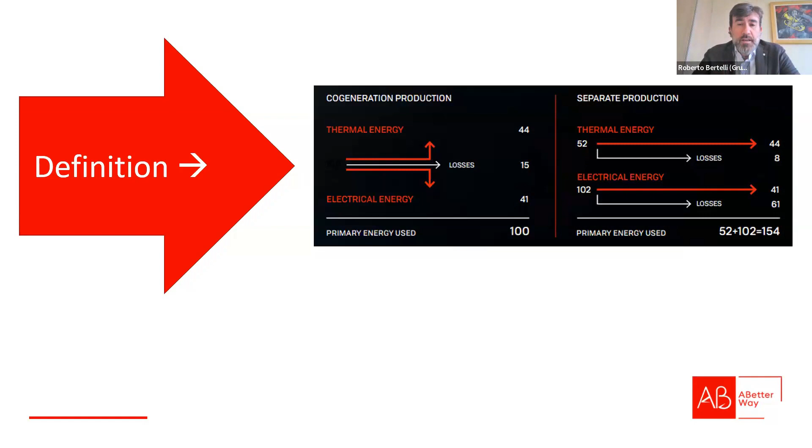Then, as I mentioned, I would like to start from the cogeneration definition. Of course, I don't want to bother anybody because we all know the definition of cogeneration. But every time I analyze a new project, I always ask myself, are we applying this definition in a proper way? Because it seems a simple calculation, but it is very important to recognize that we are saving primary energy, we are saving fuel. So that means that we are reducing emissions. That's why we firmly believe that the cleanest energy is the one that is not burned.

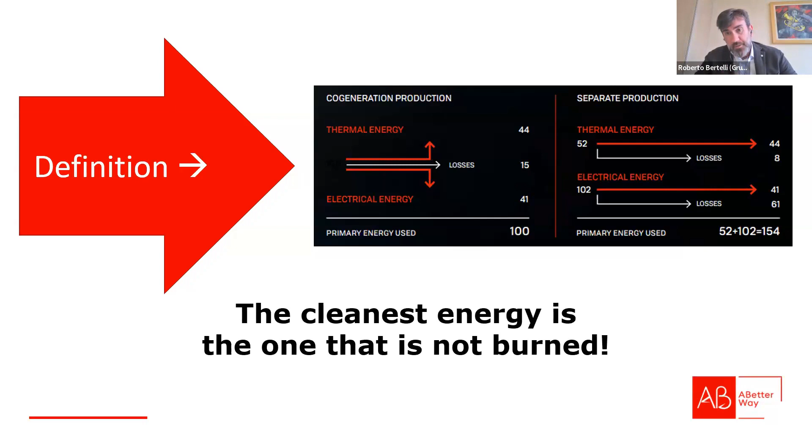So let's keep this definition on top of this page. I would like to share the following thoughts, talking about fuel saving. Have you ever compared the fuel saved from a CHP plant with, for example, the fuel saved from a photovoltaic system? Of course, talking in general, photovoltaic is a pure green energy production. It follows the sun, it doesn't produce thermal energy, so it can work 7 days per week, and it is good for those companies that work 1 or 2 shifts.

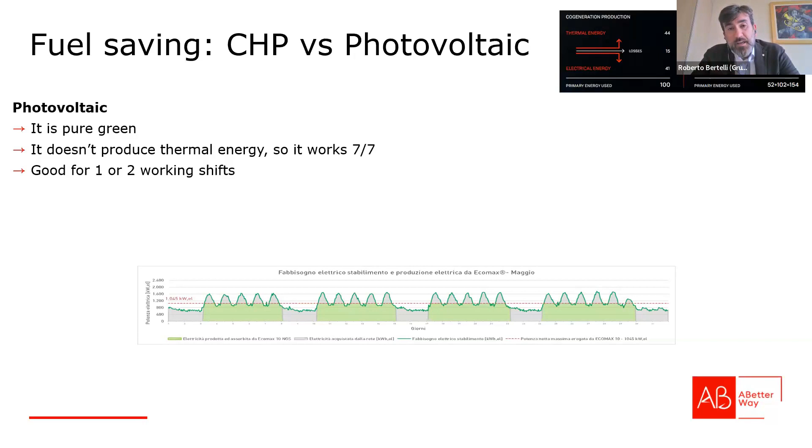I put here an image of an electrical consumption profile, just to facilitate. Because of course, following the sun, the photovoltaic can shave the peaks during the day and can support the grid stability. But then we have cogeneration. Cogeneration produces by definition energy efficiency. We are producing heat and power continuously, so it is good for three shifts. So these are the general comments. But then we can dig more and we can compare.

If we take 2 plants with an equal electrical power, and using the definition of cogeneration, how much fuel are we saving? In the case of photovoltaic, an average photovoltaic can run, let's say, 4,000 operating hours per year. But if we consider the peak equivalent, we have to reduce to 1,100. So if we take the 102 kilowatt that you can save of primary energy, and you multiply by the peak hours, you can save 112,000 kilowatt hour per year.

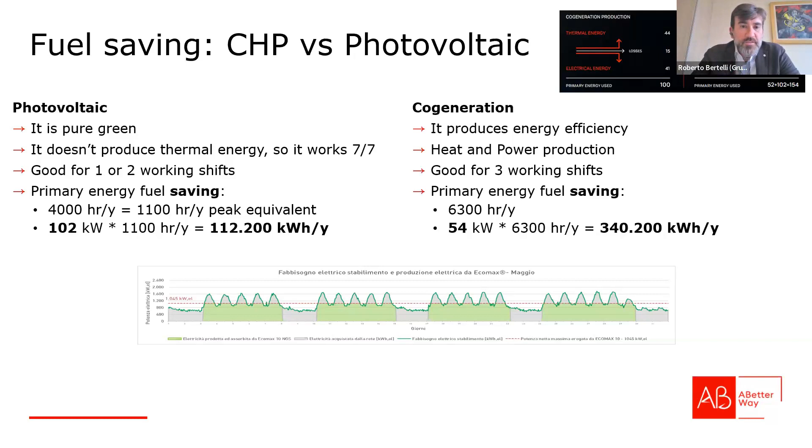Let's make a comparison with the primary energy fuel saving from cogeneration. A cogeneration plant generally runs more than 6,000 operating hours on average. Can be 7,000, can be 8,000. But let's take the example of 6,300 operating hours per year. The primary energy saved is around 1/3, so the famous 54 kilowatt. That means 340,000 kilowatt hour per year. So considering the working year, the CHP can save more than 3 times the fuel compared to the PV system.

Of course, this is a very small exercise; we can make a deeper calculation, but more or less these are the numbers. So that's why cogeneration, as a technology, is good for the environment. Of course, maybe someone could complain about where this saving is located. Okay, but to this statement, I could answer with a question.

So because at the very end, is the CO2 emission a global problem or a local problem? I mean, a backyard problem. So this is a key question to me in order to understand what we are talking about, because at the very end, by definition, cogeneration produces efficiency. So the question is what to do.

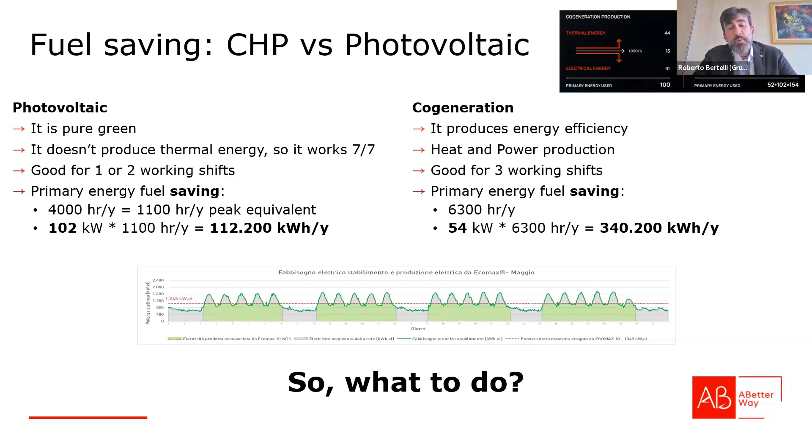So let's say, in my opinion, it is very important not to create useless competition among the technologies, but instead it is key to combine them to maximize the benefits of the cogeneration, because the cogeneration technology can concentrate a lot of activities. For example, emissions treatment. The emissions treatment, talking about engines, turbines, whatever, the technologies to treat the exhaust gas to reduce pollutants after the combustion are known and very well performing.

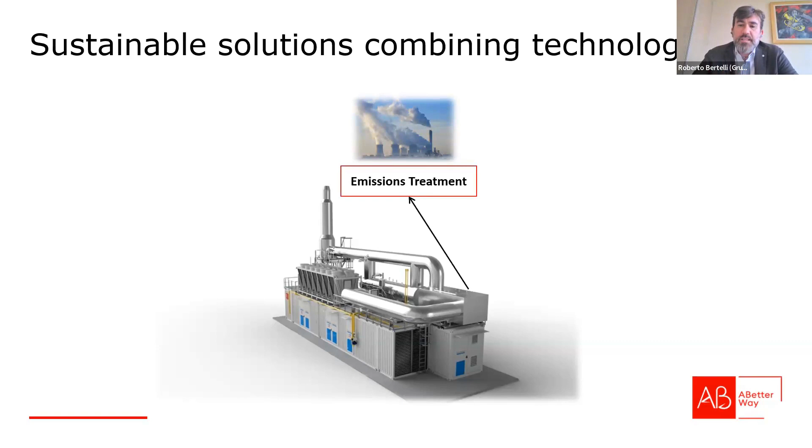And acting on the distributed power generation, we can further clean the emissions for these plants. And of course, distributed power generation can support the grid stabilization, so increasing also the resiliency of the grid. And then, of course, this would be the best case scenario. Of course, CHP plants can use natural gas and produce efficiency, but can use also biofuels like biogas, renewable natural gas, or, as the president mentioned, hydrogen.

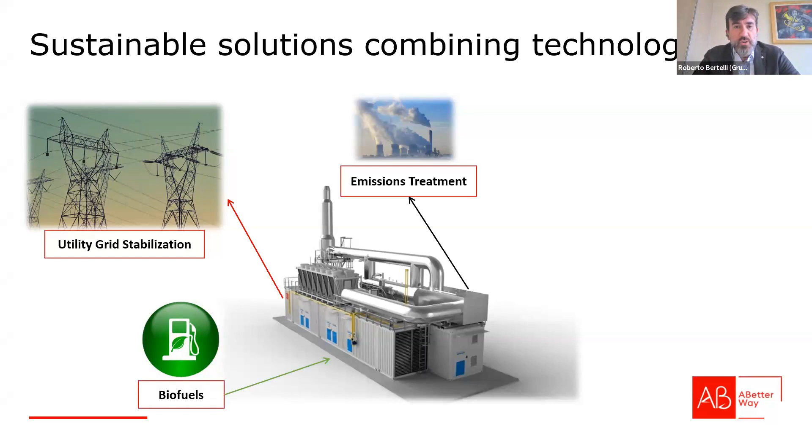So I would conclude with also the combination of the cogeneration with the renewable technologies. We mentioned the photovoltaic system, but combining these technologies, in conclusion, we can say that we can only add huge advantages in designing the best sustainable solution possible.

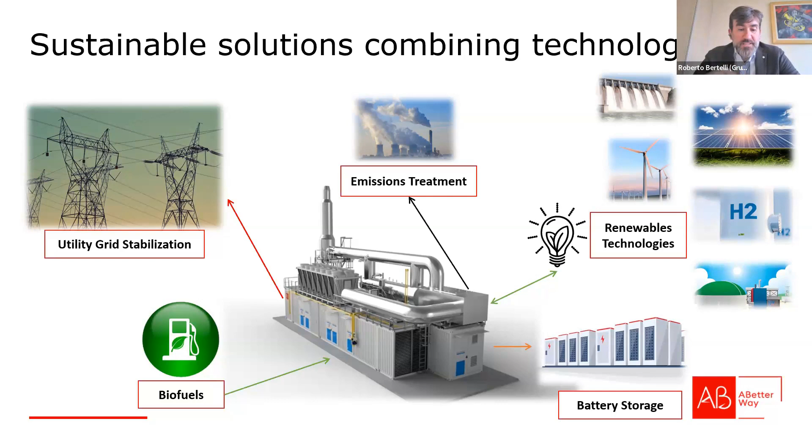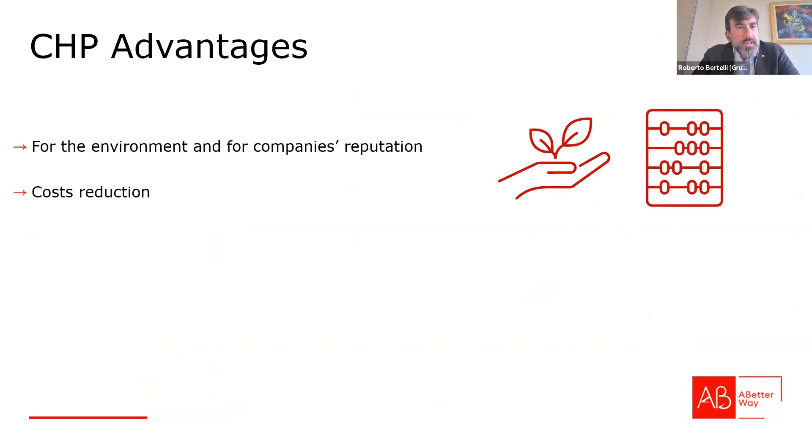So here I would say, putting all together, a well-designed sustainable solution can bring positive advantages at many levels. So of course, for the environment, for the company's reputation, and it's a way also to reduce the cost and, as a consequence, also to increase the competitiveness. But it is definitely a responsible and sustainable answer to the energy crisis that in some countries, maybe, is perceived more than in other places.

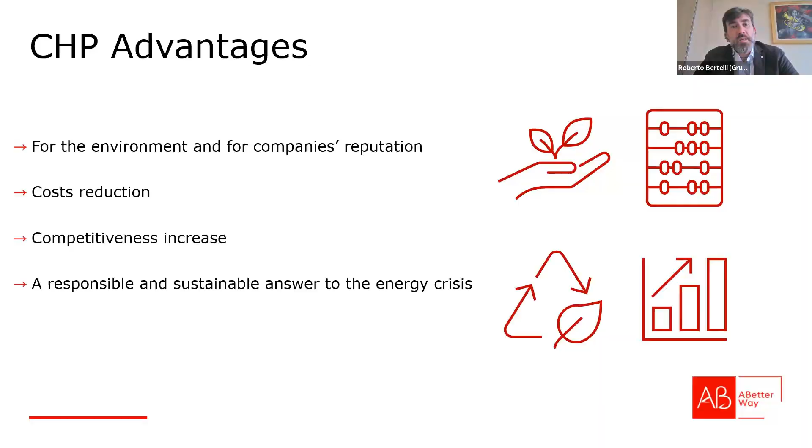So as promised, I would go to the case study. So first, I would like to share where we are. We are in the center of Italy. This plant is based in the center of Italy, not far from Perugia. I've already mentioned the company Perugina. Perugina is owned by Nestle, the very well-known multinational company, leader in chocolate production.

And here I would like to mention where the project started, because for Perugina the trigeneration experience started almost 20 years ago, when AB installed two cogeneration plants plus an absorption chiller. So altogether it is a trigeneration plant. We installed two units, 3 megawatts each, of course Jenbacher engines, model J620.

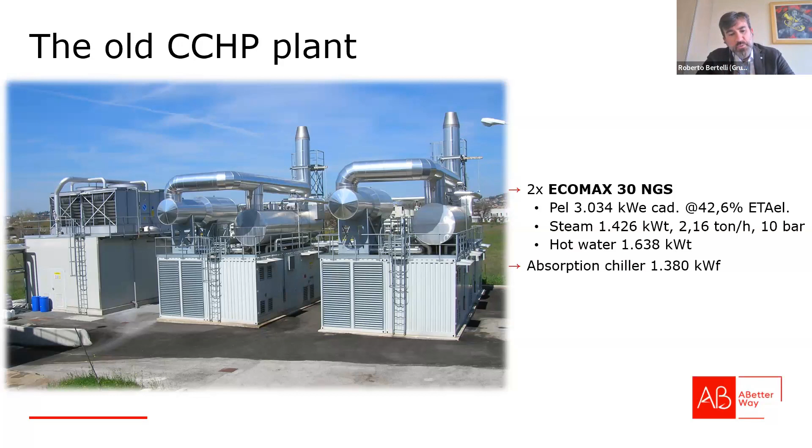Then recently, in 2019, after two times the engines' lifetime run, so after having squeezed the potential of this plant till the very end, the customer decided to renew the entire plant. And that's why, together with them, in particular with the energy manager that knows the facilities, the consumption and the needs, we dug into the customer's consumption profile in terms of electricity and heat needs. And I would say that this is the most important phase of designing the plant, because the energy audit is key in order to design the best solution possible.

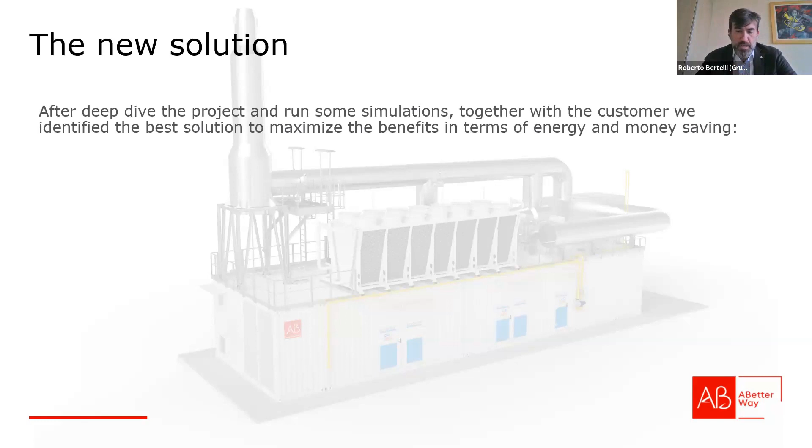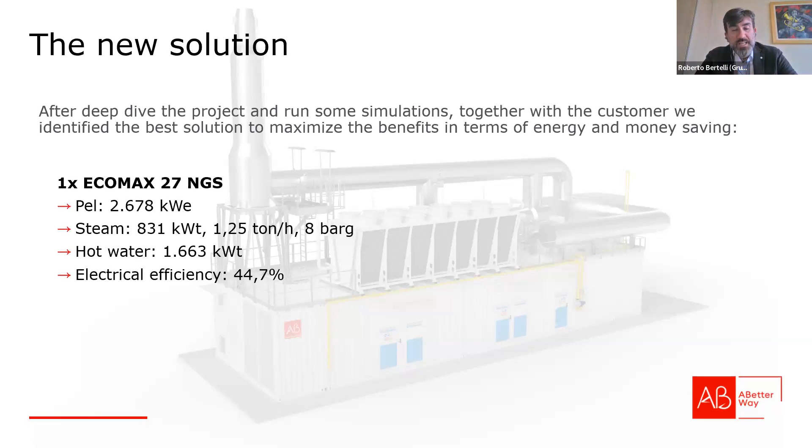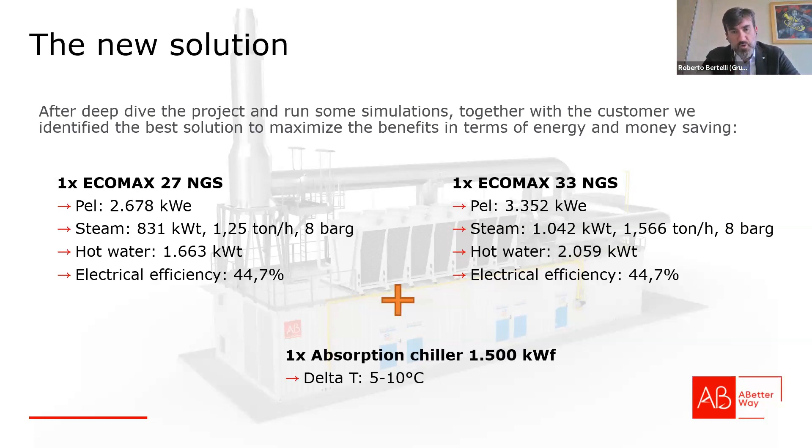And in this case, the final result was still very close to the 6 megawatt plant. So the customer chose the combination of two engines: one engine of 2.6 megawatts plus another engine of 3.3 megawatts, and of course steam and hot water production. The hot water is used to feed an absorption chiller in order to produce chilled water, more or less 5 degrees, that they use for the chocolate molds and also for the process.

Considering the new plant comes many years after the first one, the new solution's design takes into consideration the improvements made by the engine manufacturer on one side and by AB on the other side, in order to reach specific goals. For example, here you can see the difference in electrical efficiency. 20 years ago, the engines were around 40–42%. Now the efficiency is way better.

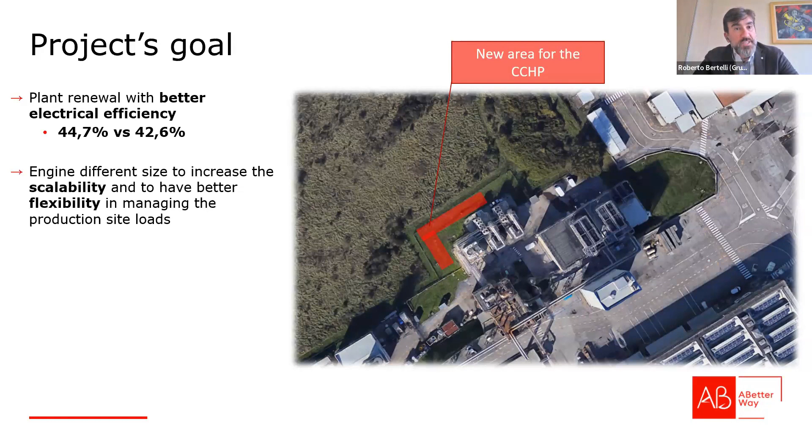And of course, having chosen two different engine sizes, we increased the scalability of this plant. So now the plant is more flexible and it's easier for the production site to manage the loads. As we follow the production loads, it is easier this way to program the engines in order to follow the customer loads.

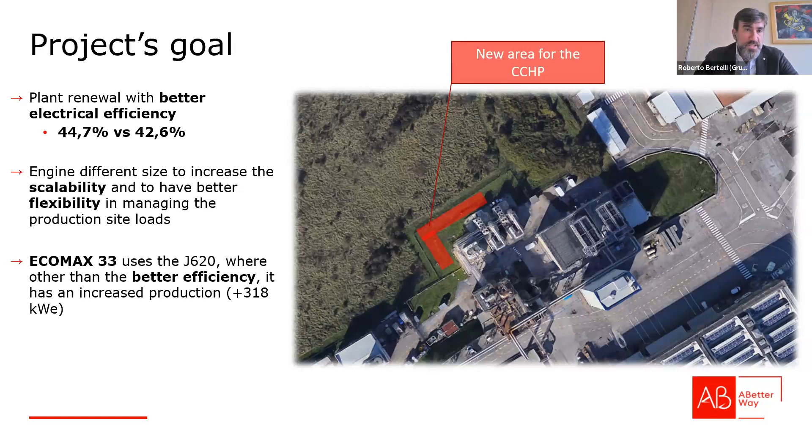And of course, it also helps that the new engine 620 has a better efficiency, but it also increased the production. So this way we were able to combine the two units, one bigger and one slightly smaller.

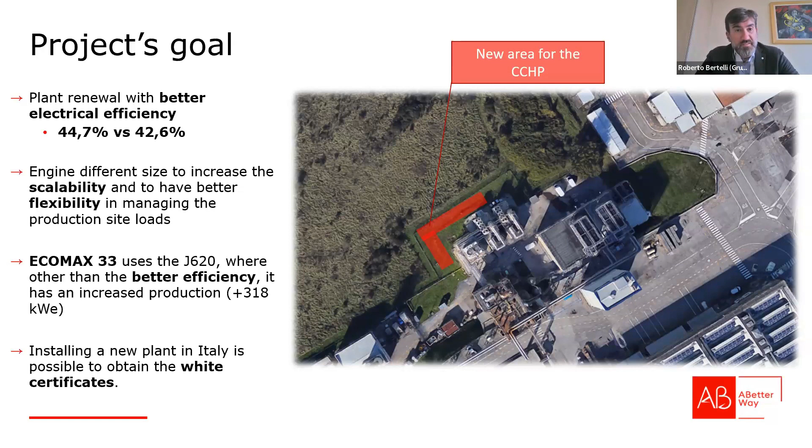Furthermore, in Italy there is a mechanism to incentivize and promote energy efficiency, and cogeneration, by definition, is part of this program. So producing energy efficiency, you can obtain the so-called white certificates. These certificates can be easily sold into the market to further speed up the return of the investment. So they are very good for this.

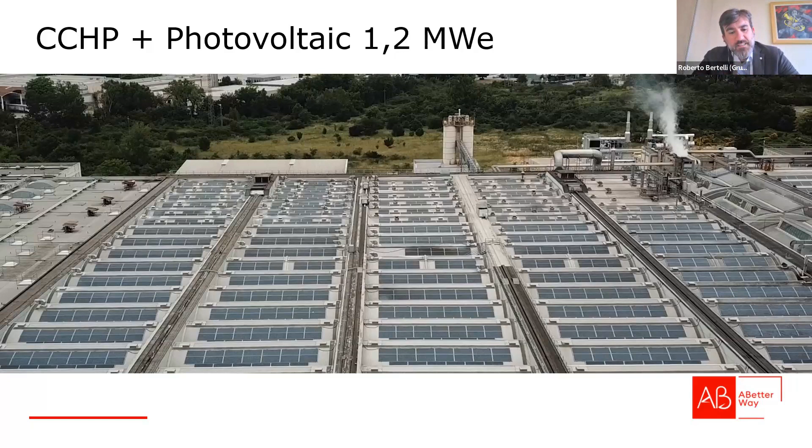Just to make a connection to what I explained earlier: in this production site, the customer also installed a photovoltaic system. Here we are talking about 1.2 megawatt peak. And together with the CHP plant during the day, we are able to follow the customer needs. The plant is very easy to program in order to buy as little energy as possible from the grid and use the self production. I think this is a tangible demonstration that these technologies can easily work together, increasing the overall positive impact on the environment.

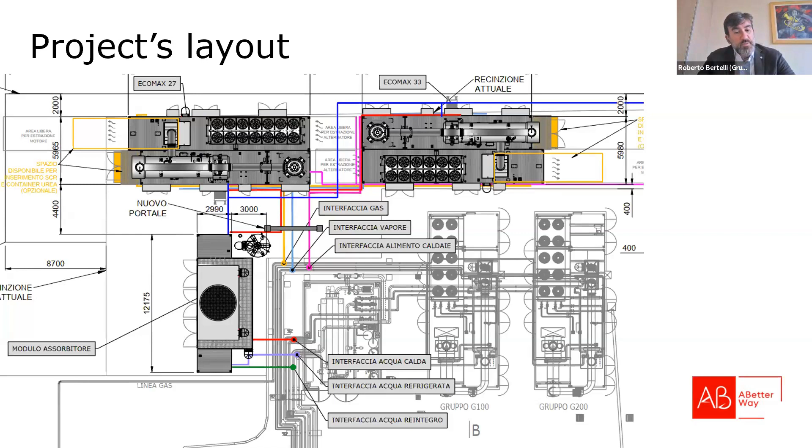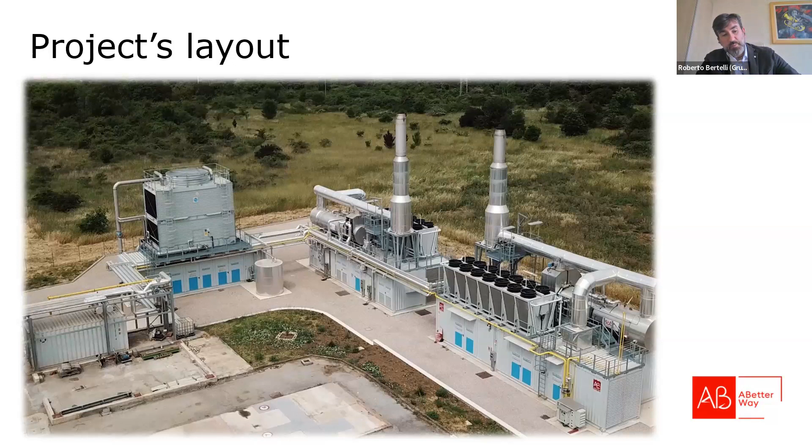Here, just to share some details about the project layout. In this case, we have positioned the new plant in a new area, but not far from the old one. This was very important during the installation phase, but also during the startup, because we had the chance to very quickly switch the plants, reducing the plant downtime for the customer. And this is the final result of the plant. Everything is in package, so the integration with the production site of the customer is very easy.

Then I will go straight to the benefits and results. Talking again about cogeneration, there are two levels of benefits and results. One part of the benefits is related to the cogeneration or trigeneration plant. In this case, the price of electricity and the price of gas in Italy, and also the so-called spark spread, is very good for this kind of installation, because the price of electricity and price of gas are strictly connected. And also having the support from the white certificates, the overall payback of the investment is quite good.

The other advantage that is, to me, quite important is that the plant renewal brings better performances. That means further fuel saving and further emissions reduction. And together with the photovoltaic integration, as mentioned, we also obtain a very good level of resiliency, and as we are less dependent on the grid, we have a very good level of stability.